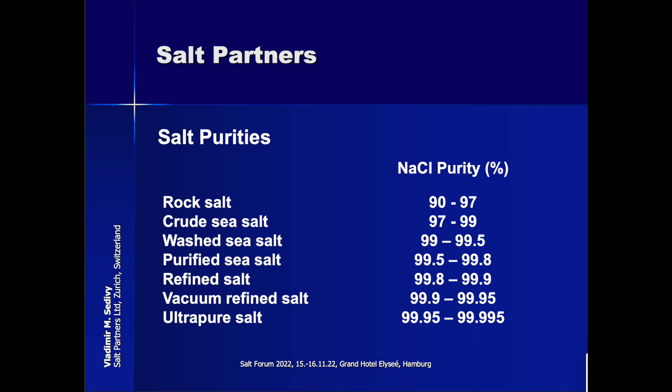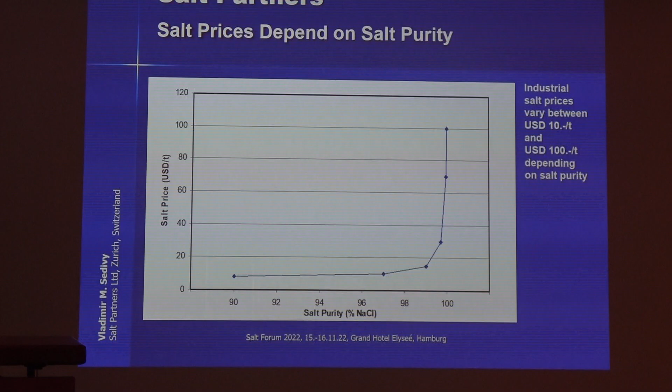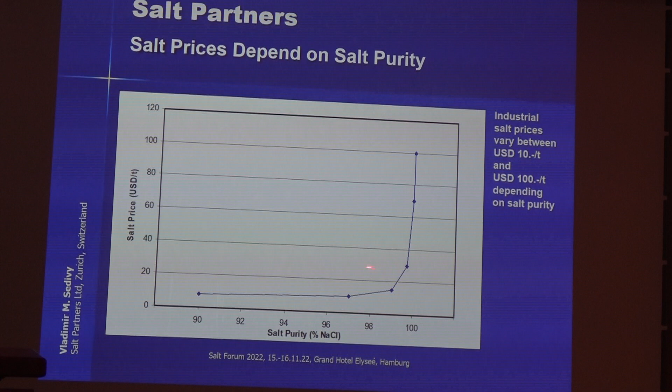The salt prices depend on salt purity, and with solar salt use and the question of prices, we are working somewhere in that curve, getting towards $20 and more per ton and approaching 100% purity. Because it is a curve like that, and the curve is quite steep in that region, whether it is good or not is then a question of just a small fraction of a percent.

Impurities in salt - the main one is calcium sulfate. It is present in rock salt, sea salt, lake salts, and brines. Magnesium salts mainly originate from seawater and are therefore present in sea salt. Calcium chloride and sodium sulfate are not present in seawater, and therefore they are also not present in solar salt.

But potassium chloride and sodium bromide are the main trace elements in salts, in all salts, and they play a certain important role in certain applications of the salt and of chlorine production, particularly in organic synthesis, where bromine is a problem. Potassium is normally not a problem, simply because potassium also produces hydroxide in the electrolytical cell, and is actually heavier than sodium, so with the same amount of electricity you produce more caustic. Therefore potassium is normally not a problem.

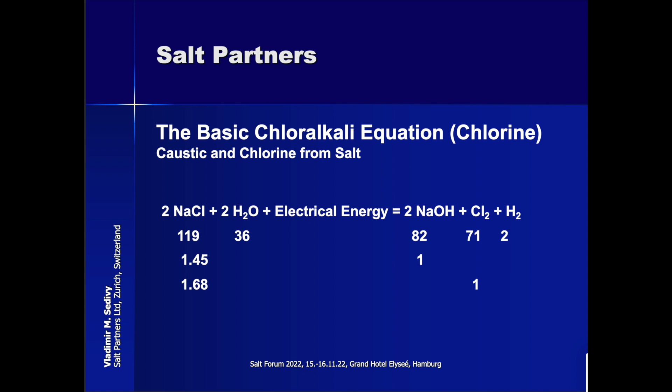The basic chlor-alkali equation for soda is sodium chloride plus calcium carbonate, which is limestone, something of very low value, to produce soda ash that we need to produce glass mainly, and several other things, plus calcium chloride.

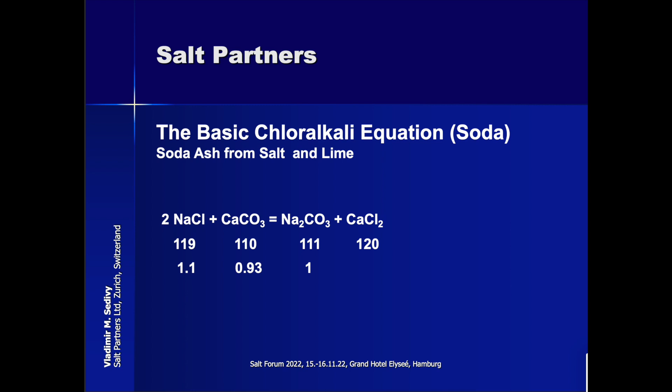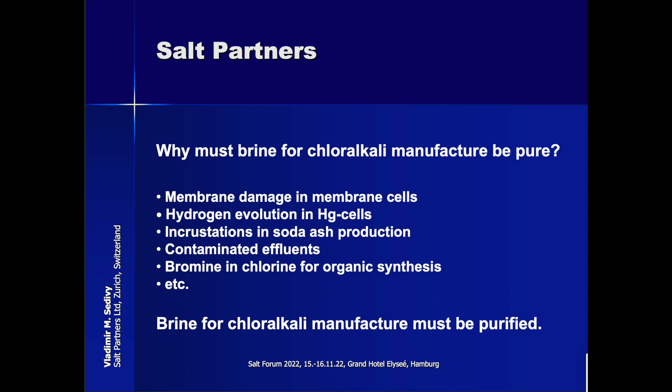Why do we need pure brine for chlor-alkali manufacture? Because there would be damage to the membrane cells, hydrogen evolution in the mercury cells, incrustations in soda ash production, particularly with calcium sulfate, contaminated effluents, bromine in chlorine for organic synthesis, and so on. The brine purification systems...

For the calcium precipitation, we have calcium and carbonate producing calcium carbonate. Calcium carbonate is what the soda ash has been produced from, and in brine purification it is again recreated. The magnesium precipitation in the caustic chlorine industry mainly uses sodium hydroxide.

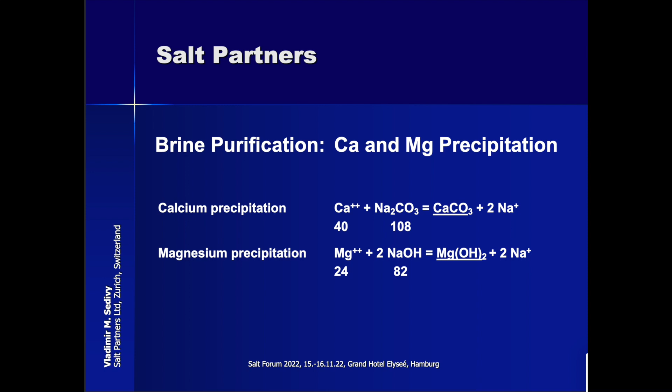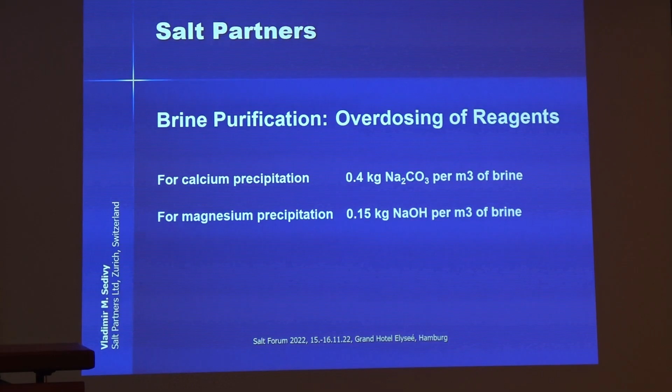The brine purification requires overdosage of reagents, about 0.4 kilo per cubic meter of brine of soda and 0.15 of sodium hydroxide. This must be so because otherwise the solubility of these insoluble components, the calcium carbonate and the magnesium hydroxide, is too high, so overdosage has to reduce it.

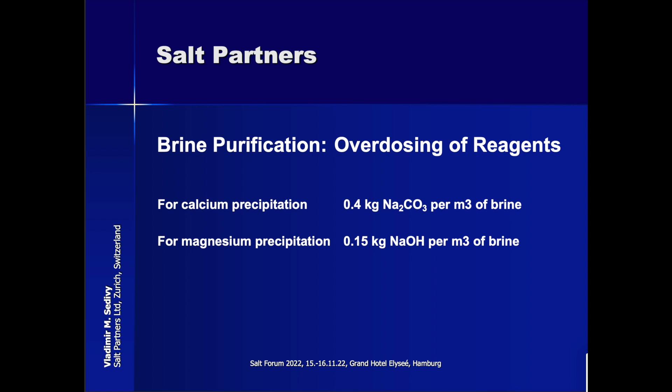This is important to know, because if the salt quality is insufficient and variable, then this overdosage always has to be done to cover all the peaks, because you cannot follow hour by hour what you are putting into the saturators. You just have to have a safety margin.

So if you are using a very good salt, you are still overdosing and spending money on that unnecessarily, and you are then feeding the cells with too much sodium carbonate, which is decomposed in the cell, and carbon dioxide is produced together with the chlorine.

Sulfate removal: the classical methods are with barium. Barium carbonate is fine. Barium chloride is poisonous, so it is not preferred. Calcium chloride requires large volumes and long residence times, and is a bit of a difficult process.

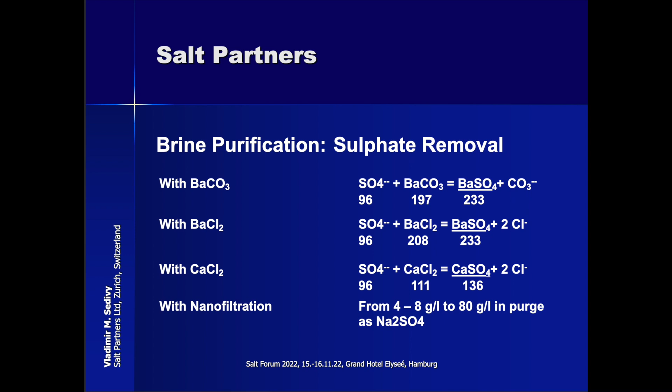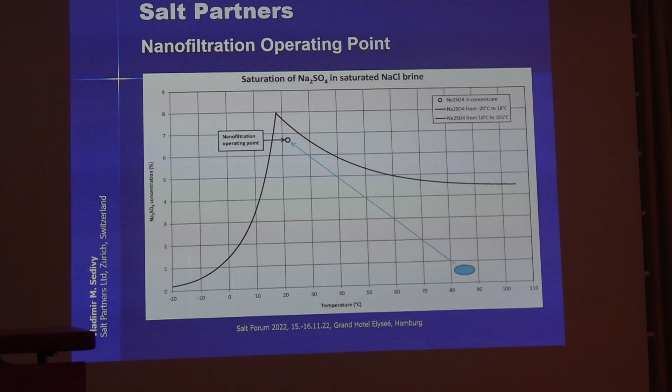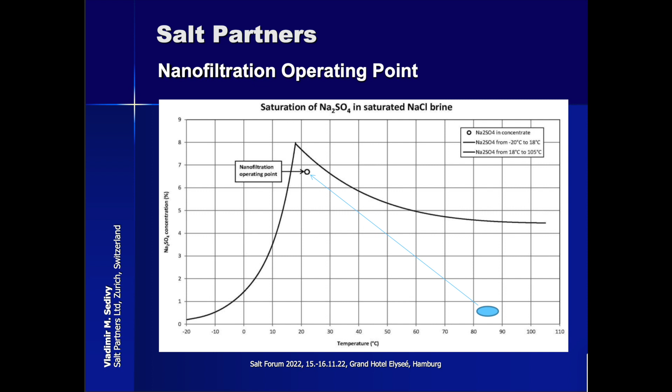Now, for the nanofiltration, this blue oval over there is the concentration of sodium sulfate in the electrolytical brine. To get it out using a nanomembrane, the brine needs to be cooled, and then it can reach this nanofiltration operating point, at which the solubility of sodium sulfate is very high, so that it can be removed.

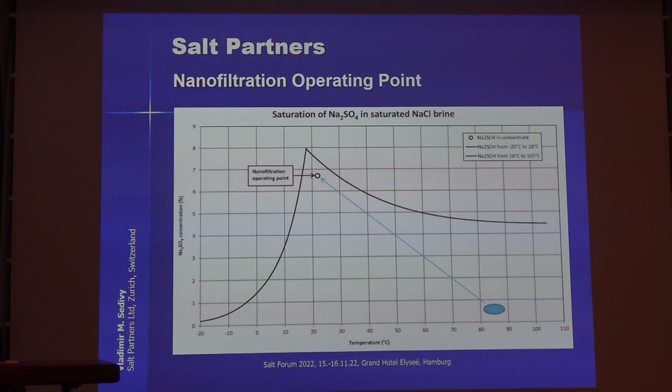Regarding the cost of brine purification, we have done a survey with companies who kindly gave us information on how much they have to pay for brine purification chemicals, and some gave us insight into several other costs incurred if the salt quality is not sufficiently good.

The brine treatment cost and the cost of the salt vary greatly in the input into caustic chlorine plants. They can be as low as $1.50 per ton of salt and as much as $30 per ton of salt.

If we also take the cost of brine treatment and disposal of these impurities, which have to be disposed of as chemical impurities although they are really just limestone, the cost of that disposal can be significant, between $10 and $60 per ton of salt. So if the salt is not well purified and not sufficiently good, the incurred costs can be very high.

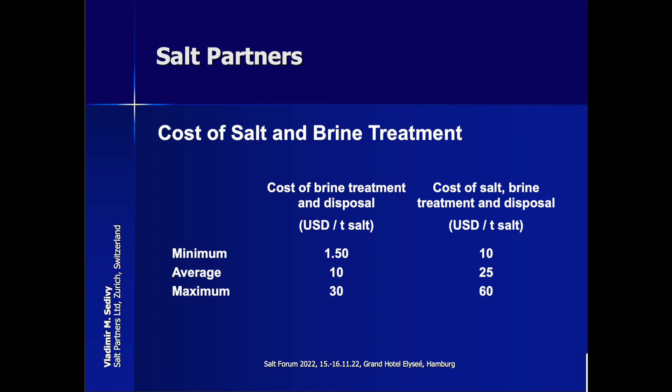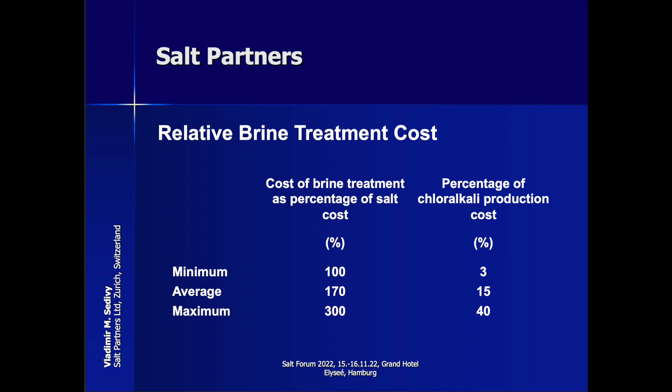This is the relative brine treatment cost as a percentage of the salt cost. So minimum 100%, but impure salt can cause costs that are three times higher. As a percentage of chlor-alkali production, 3% is very little, but if it is 40%, then it is very significant. The rest of the cost is mainly electricity.

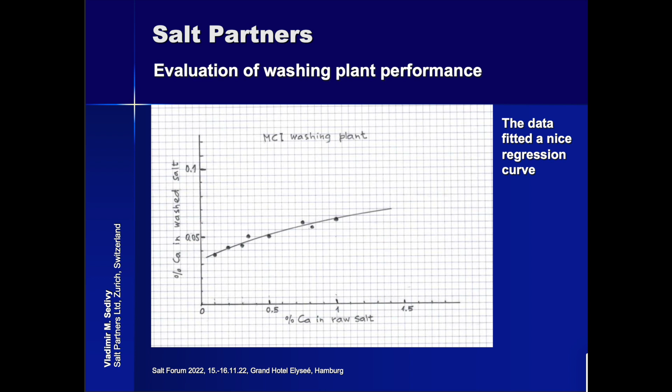When we started getting data, this was the line. We thought, well, this is fantastic, this is a beautiful correlation. We make this line, we make this correlation: if the raw salt has so and so much impurities, then the purified salt will be like this and this.

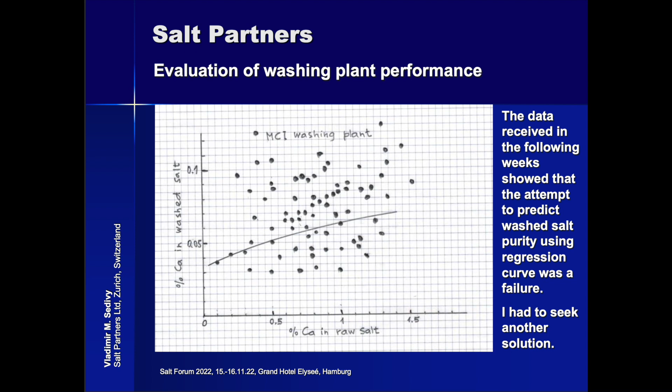However, the next day or the next few weeks it looked like that, and after a couple of months it looked like that. So we learned that there is no simple correlation between impurities in raw salt and in purified salt, and that we had to do something quite different.

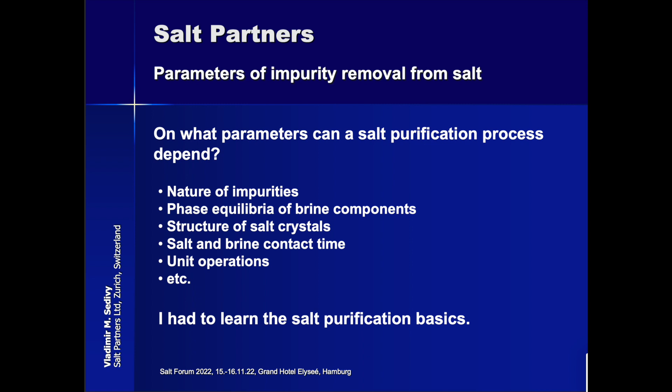So we had to study the nature of impurities, the phase equilibria of brine components, the structure of salt crystals, the salt and brine contact time, and the unit operations.

We have borrowed a mineralogical microscope from the University of Zurich and have made some photographs here. On the left-hand side, normal light, in the middle polarized light, and on the right-hand side, phase-shifted polarized light, which then shows both the sodium chloride and the impurities.

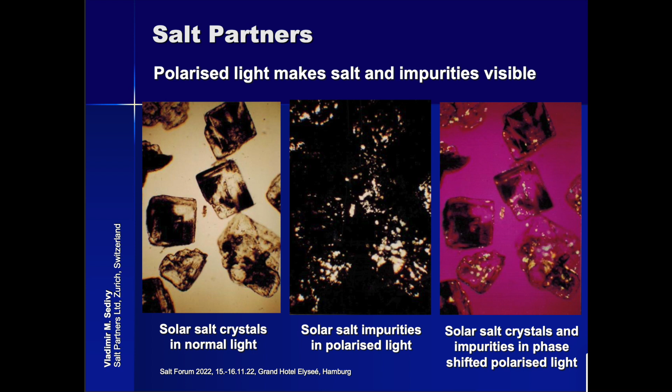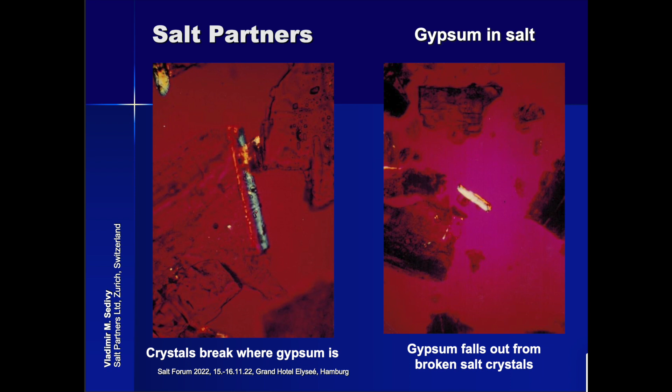We have then identified these impurities. We had to identify them first. We have created them, synthesizing the impurities as astrakhanite, as bitter salt, and as calcium sulfate. We have then found out that the calcium sulfate particularly can be removed from the salt by crushing, that it actually falls out from the crushed salt crystal.

We have found out how to elutriate these calcium sulfate crystals on the left-hand side. And we have also found out that if we are just trying to wash the salt, then we are washing, dissolving, and at the end we just have only impurities and no salt left.

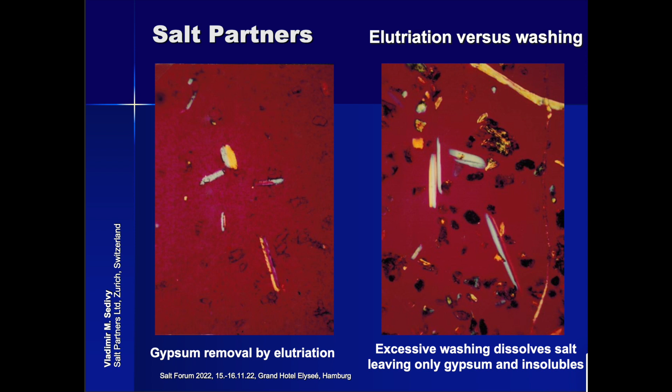This shows that even after a very thorough purification with saturated brine, which does not dissolve the salt, we still have some impurities left. The impurities that are not removable, we call them the upgradeability of the salt.

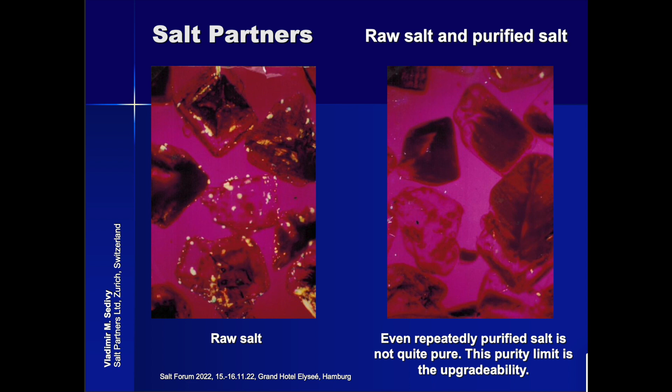And in the hydrosol process, we have reversed this process, and we actually crystallize the sodium chloride out of the purification solution. We are not washing the salt, we are actually crystallizing the salt from the washing brine back onto the salt crystals. The principles of the process: we have a centrifuge and we have filtrate from the centrifuge.

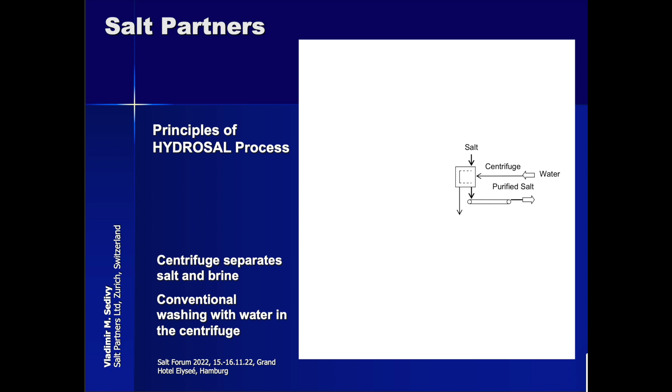The filtrate always contains some fine salt. We are taking this fine salt, adding a little water, dissolving it, and creating pure saturated brine. We are returning the pure saturated brine into the hydroextractor, where the brine flows against the salt crystals and is picking up the impurities from the salt.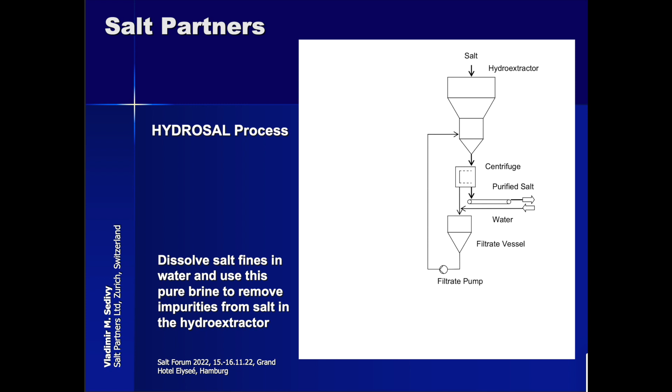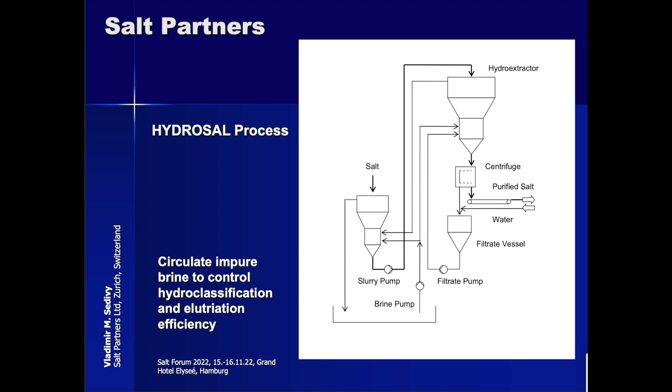We are transporting the raw salt by hydraulic slurry pumping from an elutriator into the hydroextractor, and we are circulating brine through a settling pond for adjustment of the velocities, the rising velocities in these vessels, in the various zones of the vessels, to provide the purification unit operations. The unit operations are elutriation.

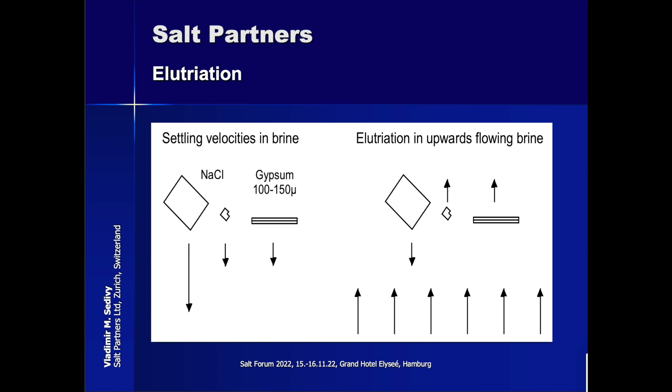When we have large salt crystals in a brine, they fall fast, according to Stokes' law. The small particles of salt and gypsum fall slowly. So if we reverse the flow of the brine upwards, then we are still receiving the large salt crystals by settling, but the gypsum crystals and the fine salt dust get lifted into the overflow of the elutriator.

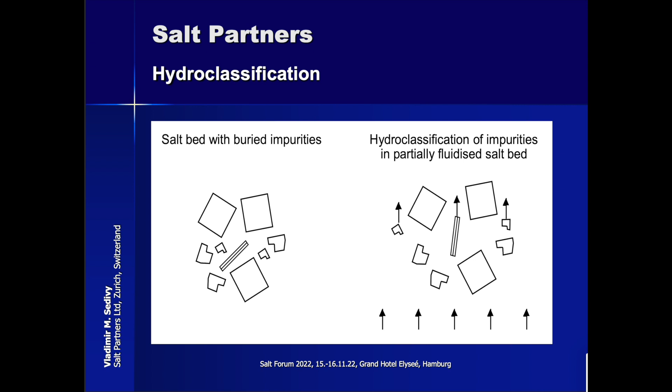Thus we are purifying the salt of the insoluble calcium sulfate and insoluble contents. The hydro classification is a bed of salt crystals that is slightly fluidized, and then we can also remove any remaining impurities or fine particles, calcium sulfate, by fluidization with upwards flowing brine.

The hydroextraction takes place according to the phase diagram that I showed you before, and the pure sodium chloride brine, this 25% here at the bottom, is then passed through the bed of salt crystals in upwards flow, picking up the magnesium chloride and magnesium sulfate, and these are displacing the sodium chloride from the solution, which then crystallizes on the salt crystal surface.

So we are dissolving the salt, but we are also recovering the salt, and therefore the final losses in the process are very low, on the order of 3%.

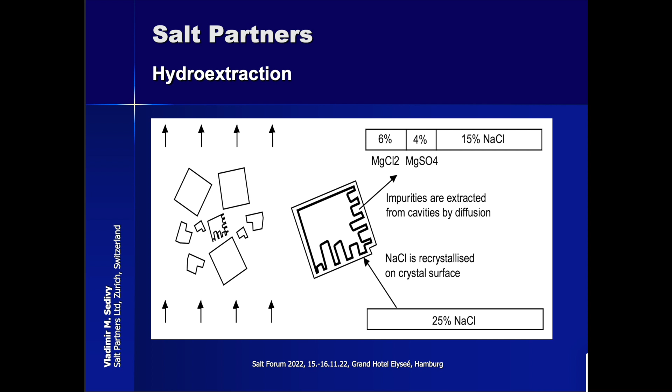The hydroextraction does not work always very well if the shape of the hydroextractor is not correct. Then so-called rat holes are formed, and they are, of course, pulling the impure brine into the pure brine. Everything is mixing up, and it does not work.

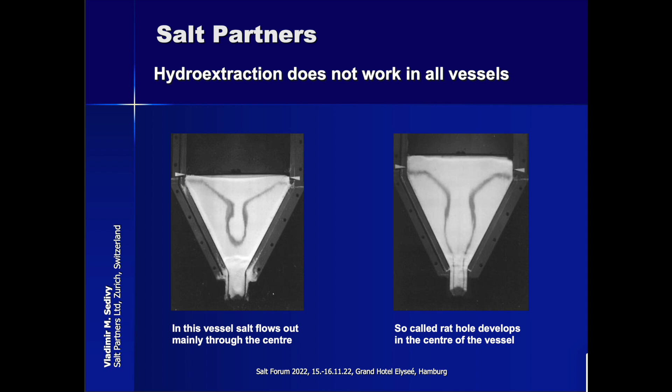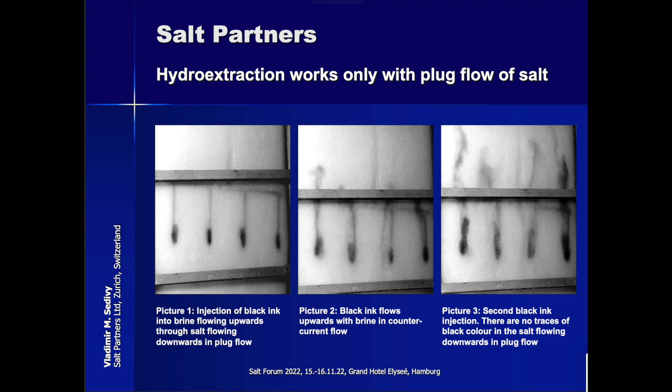To verify that it works and how it works, we built a pilot plant at the University of Erlangen near Nuremberg, and this was the result. We had salt particles flowing down and brine flowing up, injecting black brine into the white brine. We saw that what is black only moves upwards, nothing goes downwards, and after a sufficient layer of salt crystals, the black brine is distributed to every crystal, so purification takes place across the whole cross-sectional area of the hydroextractor.

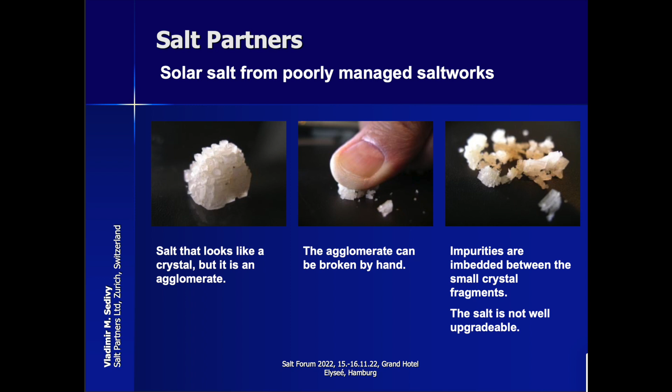Solar salt from poorly managed salt works is not homogeneous. It forms agglomerates, which are soft - you can break them up just between your fingers. If you have an agglomerate of small crystals, the space between them is full of impurities, and it's quite difficult to get these impurities out. So this type of salt can only be purified with crushing.

Biologically managed solar salt works also produce very good quality solar salt - hard, homogeneous monocrystals that don't contain impurities inside. These can then be purified very well in the purification plant.

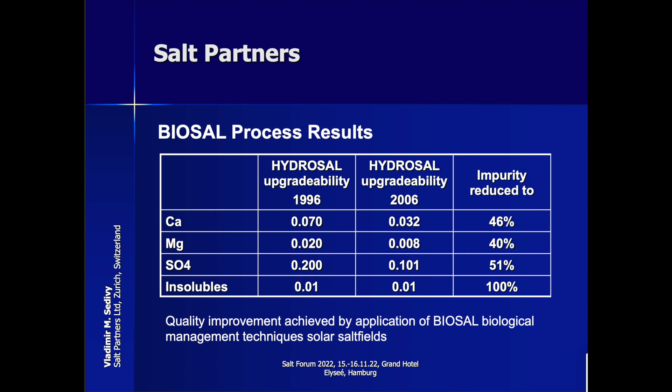The calcium-magnesium ratio is extremely important for brine purification because it facilitates good precipitation of calcium together with magnesium hydroxide, and it improves its settling properties and filterability.

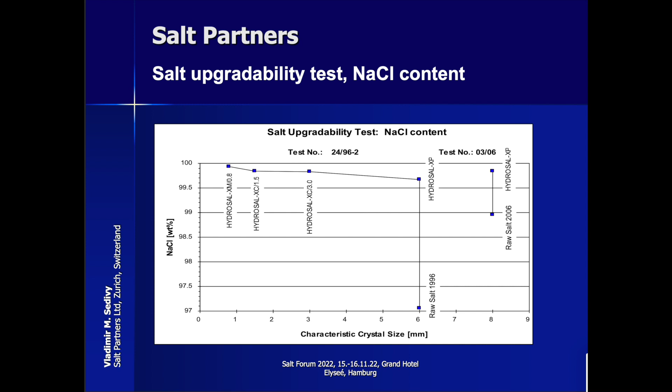Here is the difference between the 1996 salt and the 2006 salt, again shown in graphical form.

We are building these salt purification plants. One of the first was built in 1980 - a 15 tons per hour salt export plant, still operating, still running from Monday to Saturday every day, except for Ferragosto, 2 weeks, but only for the workers, not for the maintenance people.

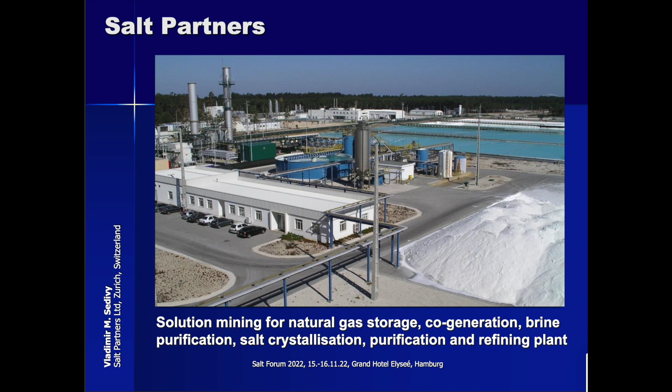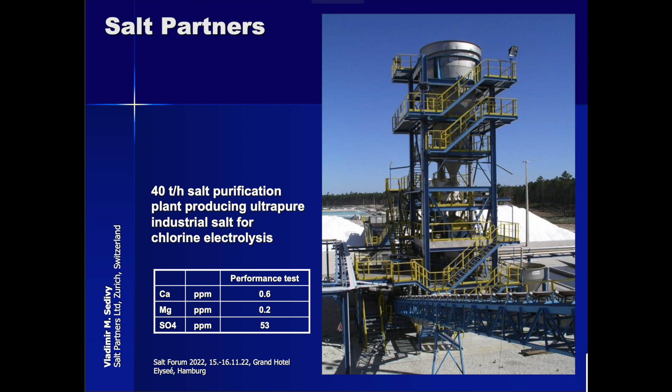Here is a plant we built in Portugal - this is the HYDROSAL purification plant with excellent quality. We claim, and can prove, that this is the purest industrial salt for caustic chlorine production in existence. It has slightly over 50 ppm of sulfate, which compares favorably even with any vacuum salt.

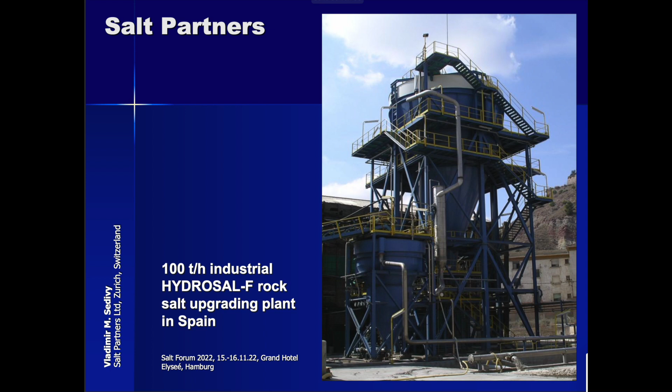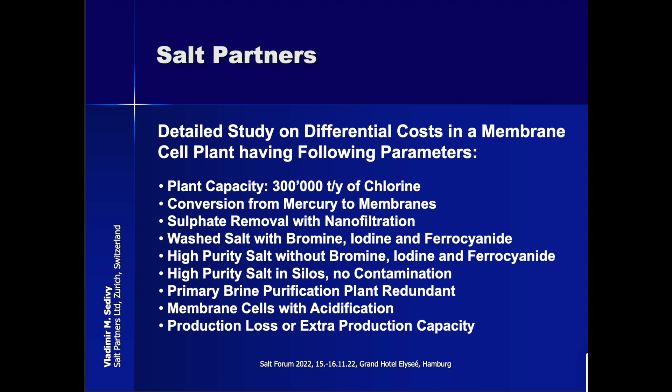We have experience with rock salt upgrading for caustic chlorine production, and we carried out detailed differential cost analysis in a membrane cell plant for 300,000 tons of chlorine per annum. These are the elements we were looking at - not just purification of the brine, but several other elements relevant to the cost of brine purification in a caustic chlorine plant.

These are the elements of the cost: salt storage and handling, which with pure salt is much easier than with impure salt; salt dissolution; brine purification; contaminated sludge handling and disposal in Europe. The disposal of these chemical components from the brine purification plant costs about $1,000 per ton, so it is very expensive.

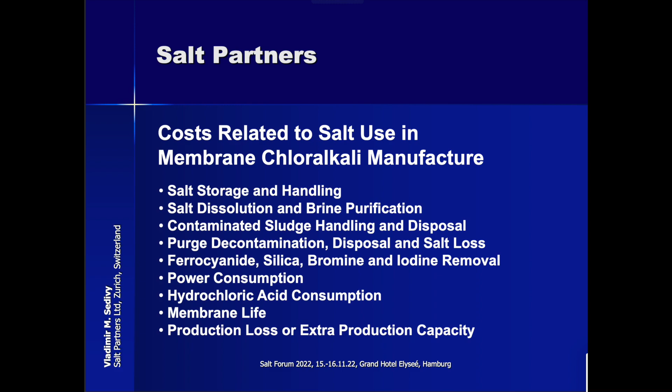Then the use of ferrocyanide, silica, bromine, iodine, power consumption, hydrochloric acid consumption in the cell, and membrane life are the elements of cost in caustic chlorine production, and they are all related to the quality of salt.

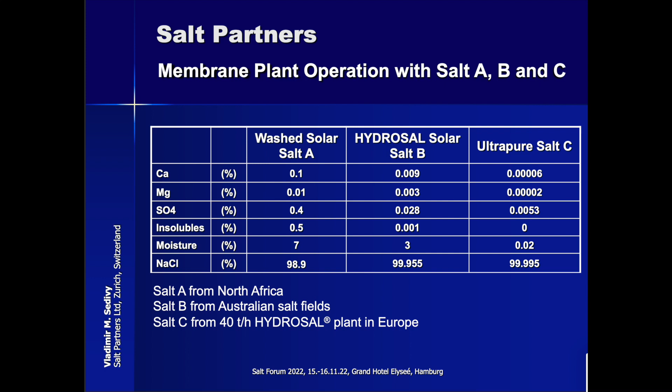The operation of the membrane plant with salts A, B, and C is shown here. We have washed solar salt with 98.9% purity as an example, a good quality solar salt - HYDROSAL salt B - where we can reach 99.95%, and an ultra-pure salt at 99.99%, which is what we've been producing in the HYDROSAL plant in Europe I showed you before.

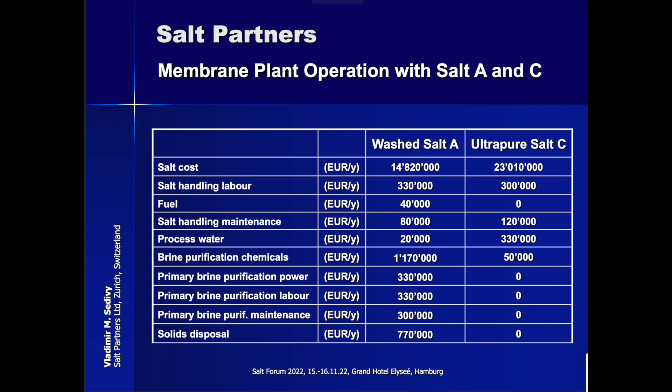The operation of these plants with salts A and C was calculated here in great detail. This was the 300,000 tons per year chlorine plant, where we carried out a detailed technical audit and received all the data. These were the elements we were looking at.

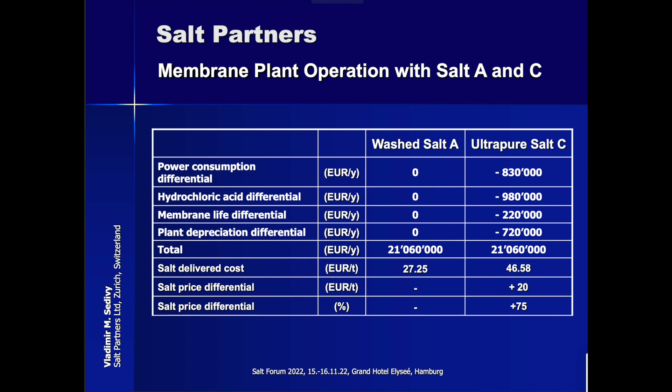The result is that if washed salt delivered to the plant costs 27 euros a ton, then a very pure salt could be sold or supplied for 46 euros - about 75% higher price, the equivalent of that. This shows the importance of salt quality for caustic chlorine production.

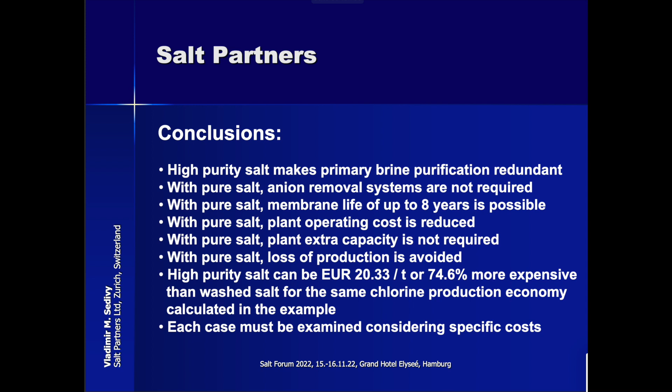So, how to turn salt into gold? Very simple: you produce it at this cost and you sell it at that price. So why don't you turn your salt into gold? Thank you.